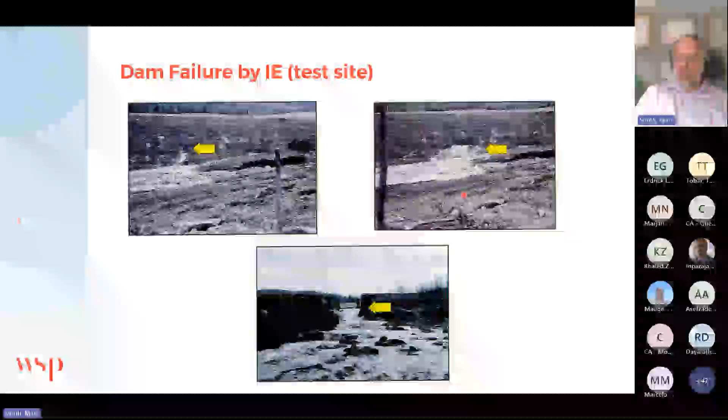So basically, internal erosion is, in fact, erosion of the soil internally due to seepage forces. And as we can see in the photos, this is a process. So it's not an instantaneous occurrence. Internal erosion is one of the main, in fact, the main geotechnical cause of dam failures in the world, as we can see here. So there's another example of internal erosion going on. So we see the reservoir and we see lots of seepage coming out of the dam, as well as the dam being eroded.

Another, let's say, prevalent cause of dam failures is what we call external erosion. The reservoir overtops the dam, as we can see here. But the primary causes of this are more related to hydraulics and hydrology. So basically, in geotechnical engineering, internal erosion is the main issue in terms of dam design, construction, and operation.

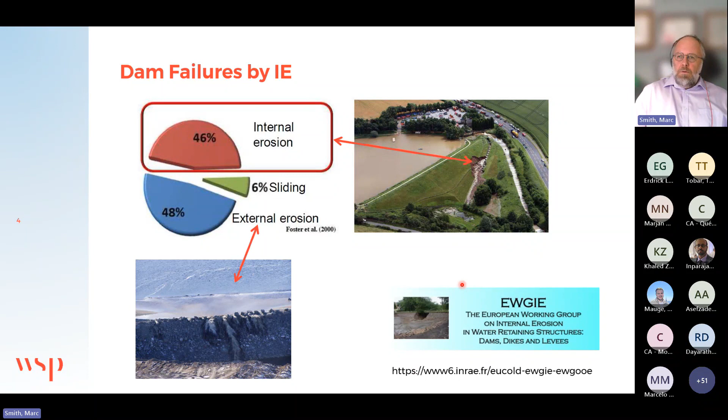As I said, there is lots of research going on in this field, including this group here, which is still quite active in bringing together practitioners and academics to increase the knowledge about internal erosion. For more info, the website is here. Also, academic research and practitioners are very interested in this subject. For example, there is one bulletin here that was published by the International Committee on Large Dams. In fact, it's a two-volume bulletin, volume 1 and volume 2, in which all the concepts behind internal erosion are explained, and volume 2 is mostly examples of internal erosion. So my presentation is basically based on the concepts presented here.

And also just to mention to everyone that these bulletins are available almost free of charge. One way to do so is to become a member of the Canadian Dam Association. You can be an individual member, or if the case applies, you can be a student member of the CDA and have access to this bulletin and all the other bulletins. Just to mention that the student membership is $5 a year.

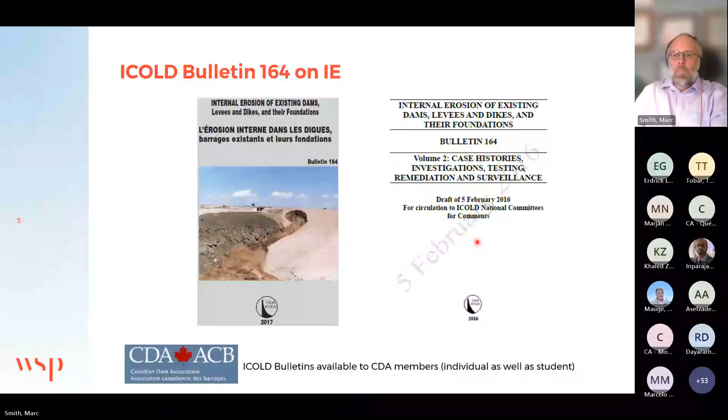So the initiating mechanisms involve soil particles under seepage with sufficient energy. So the particles are driven by this energy, which is the hydraulic load here. For internal erosion to occur, there must be seepage, obviously. Also, presence of erodible material along the flow path, and also a possibility for this eroded material to escape out of the dam. So these three conditions must be met if internal erosion is to occur.

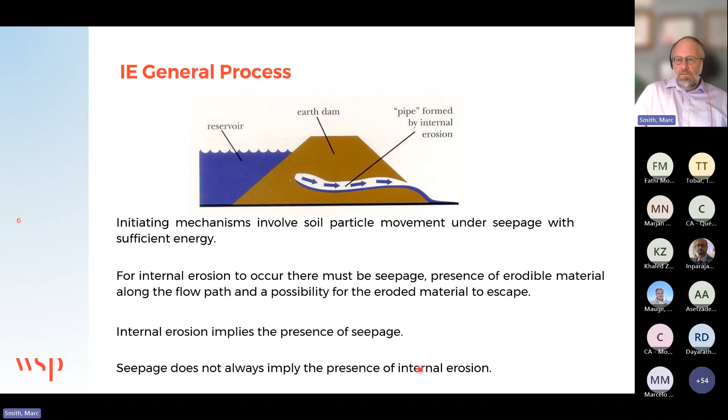So as a corollary, if these three conditions are not met, internal erosion should be prevented, and we should prevent it as dam designers. So we must prevent the presence of erodible material and also the possibility for it to escape. Internal erosion always implies the presence of seepage, but the reverse is not true. Seepage does not always imply the presence of internal erosion. So this is why it's so difficult to detect it in the field.

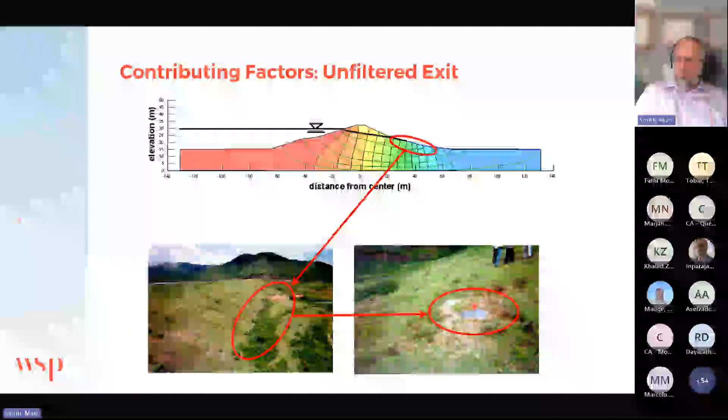So internal erosion is not completely a 0-1 event. It's not on or off. There are contributing factors that make the likelihood of internal erosion more or less likely. One of these contributing factors that increase the likelihood of internal erosion is unfiltered seepage exits. Here we see a flow net of a homogeneous dam on a homogeneous foundation without any filters, without anything. So we see the seepage exits here, which are not filtered. I'll talk a bit more later on filters. So the seepage can come out freely, as well as the particles that are eroded. Here we see that same dam with more vegetation where the seepage exits, and also here the particles that are eroded out of the seepage.

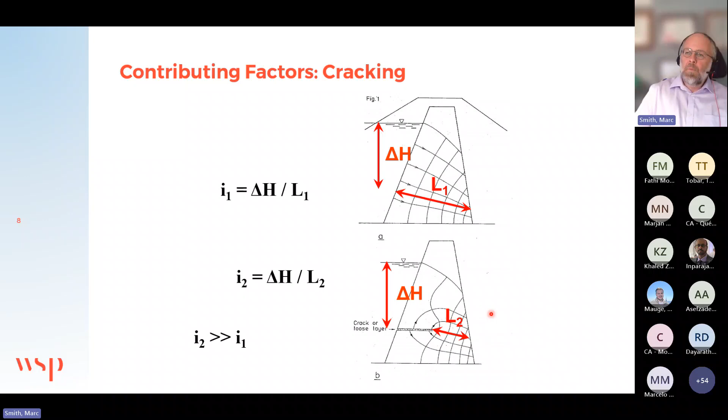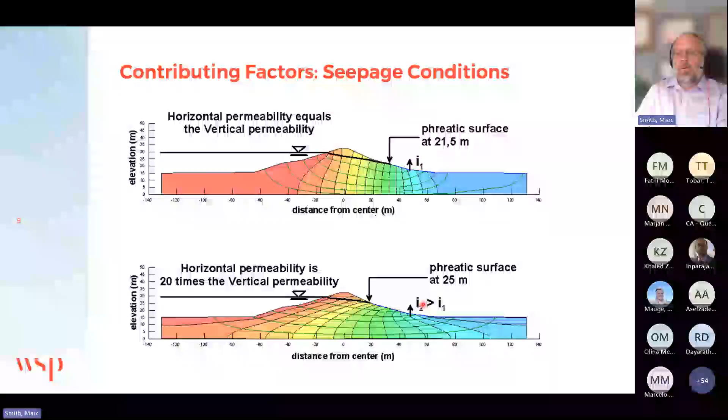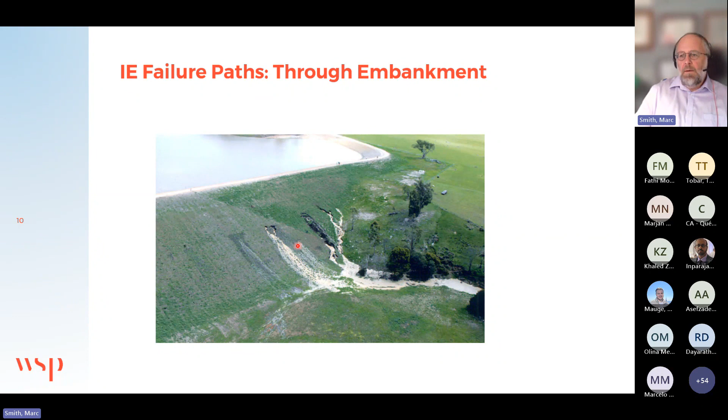And internal erosion can occur along many paths. So here it's the basic form of internal erosion through the embankment itself. Also, internal erosion is much more likely where embankment structures make contact, such as the contact between a rigid concrete spillway and a compressible embankment dam, such as this one. By settling, the dam can create gaps between the embankment and the spillway, and this flow path increases the likelihood of internal erosion.

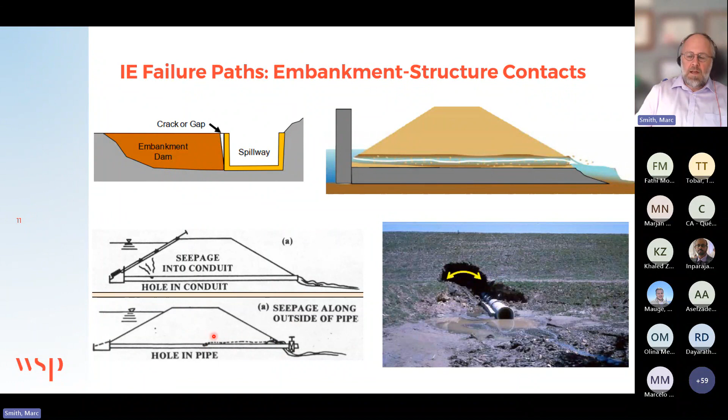Also, the presence of conduits in embankment dams can be a weak spot if not designed carefully. As we see here, erosion occurred outside of the concrete conduit. Here we see another figure showing the conduit and water coming out of it. If there's a hole in the conduit, then the seepage in the dam itself can go inside the conduit through this hole and erode particles with it. On the reverse, if there's a hole in the pipe and water flowing into it, then this water can come out of the pipe and erode the adjacent soil. This photo here is an example of this having occurred.

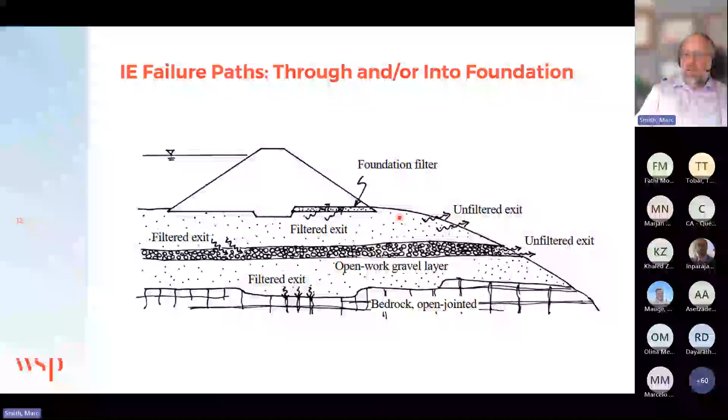Also, the internal erosion path can go into the foundation or through the dam and its foundation. Dam foundations can be quite heterogeneous, as we can see here. So the seepage can take any path it wants. And depending on the compatibility between the soil layers, we can consider that the seepage is filtered or not filtered. For example, here it's not filtered, so there is danger of internal erosion. It's not filtered here as well, so there's a danger here, etc. We'll see examples of this later.

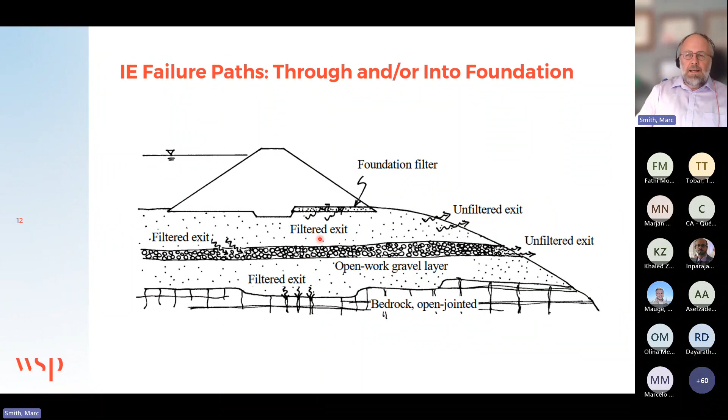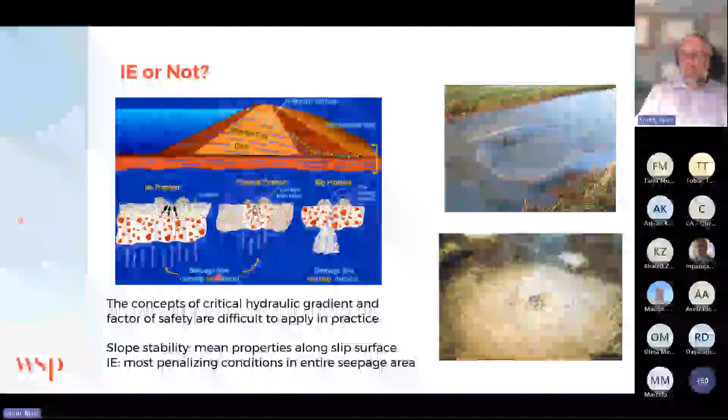In this case here, the water remains clear. It's only the same soil particles that are moving but staying in place, without new inflow of soil particles. So in this case, although it's quite spectacular, there is no internal erosion. This is what is shown on this figure. No problem, or possible problem: seepage flow carrying no material or no new material. And here there is a big problem, where new material accumulates at the seepage exit.

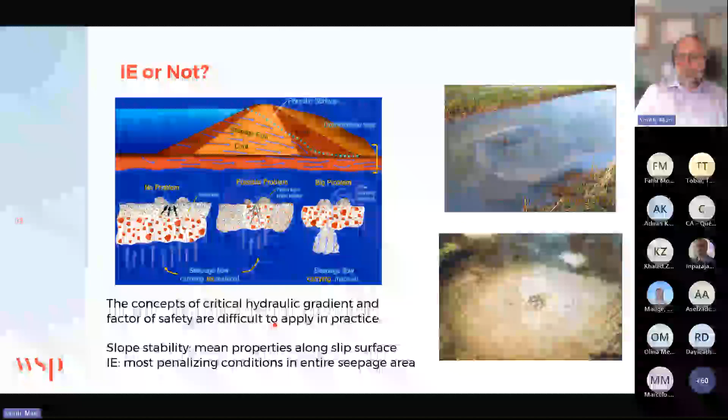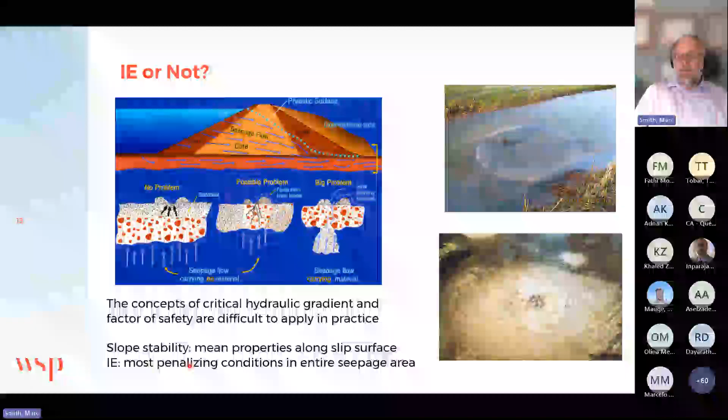What's also difficult with internal erosion is that there are no real factors of safety related to this phenomenon. We can see here and there critical hydraulic gradients, etc., but these concepts are more based on laboratory conditions and they are very difficult to apply in practice. So I wouldn't rely on any factor of safety estimation for an assessment of the likelihood of internal erosion. Also, internal erosion occurs exactly at the areas where the conditions are most penalizing. If we have a 1 kilometer long dam and there's one specific 10 centimeter wide area where the conditions for IE are met, then problems will occur there, regardless of the condition of the dam elsewhere. So it's really at the most penalizing area.

For slope stability, it's a bit different. The factor of safety for sliding basically depends on the mean properties of the soil along the slip surface.

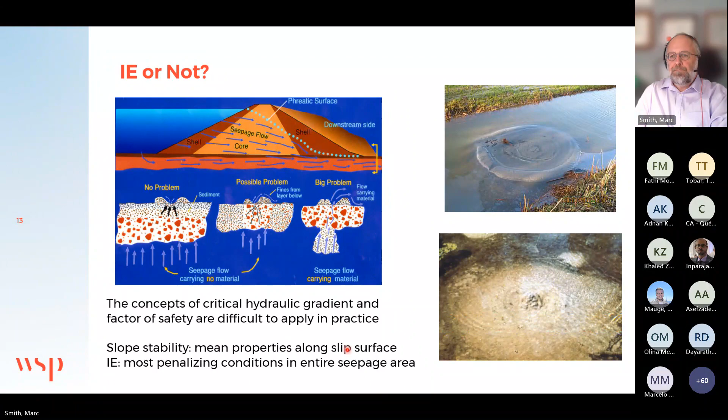IE occurs as a process, as shown. The first step is called initiation, where the soil grains begin to move. Continuation refers to the moving soil grains getting out of the dam system, so there is no filter. So initiation: particles begin to move. Continuation: the particles go out of the dam system. Progression means that there is nothing to stop the process. To stop the process, we can lower the reservoir, or the dam can collapse in itself.

There could be self-healing, etc. So there could be phenomena occurring during continuation that stop the progression. And if nothing stops the progression, then the breach will occur. So there are 4 basic steps in the IE process.

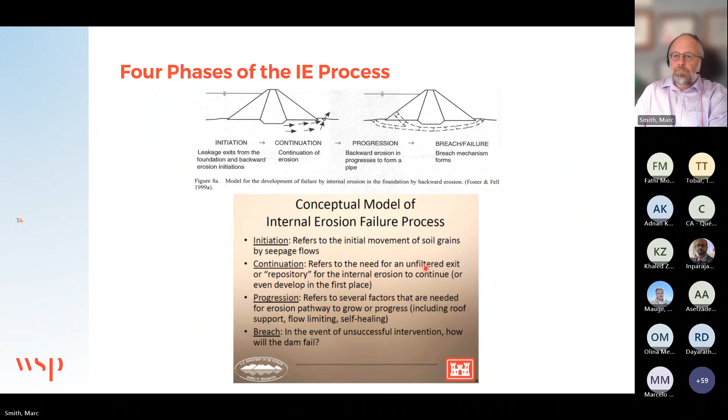Hello, Marc. I think we lost you. Yes, I'm still here. Now it's working fine. Yeah, we lost you before. It's okay? Yeah, now it's working fine. Yes, I saw that.

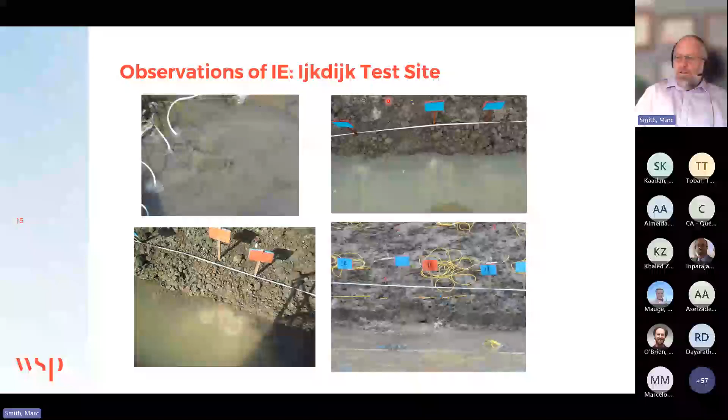Perfect. So I was in the process of initiating internal erosion at that Ijkdijk test site. The water is cloudy here, so the first particles were starting to move. After a while, we could see some specific seepage areas where the particle content became a bit higher. Then the specific area began carrying out a larger amount of particles. After that, a hole could be seen, and a delta made from these eroded particles as well. Then the delta became larger and larger, and the hole wider. All of this led to the rapid formation of a breach.

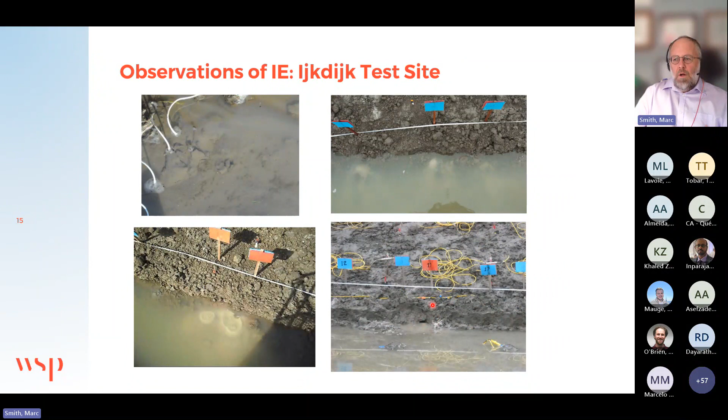So it's really a process that starts slow, but when it evolves to a certain point, there's pretty much nothing we can do to stop it.

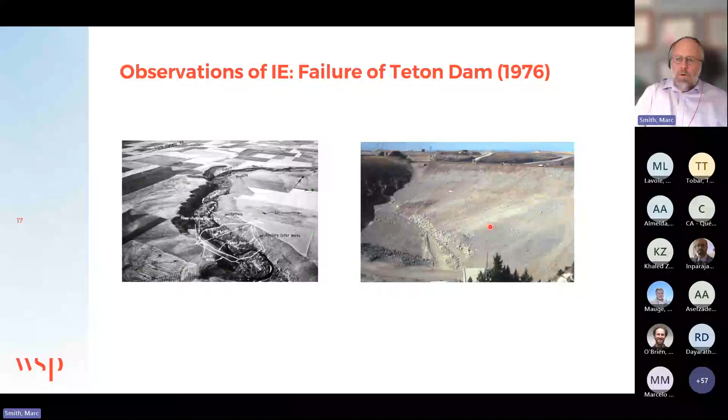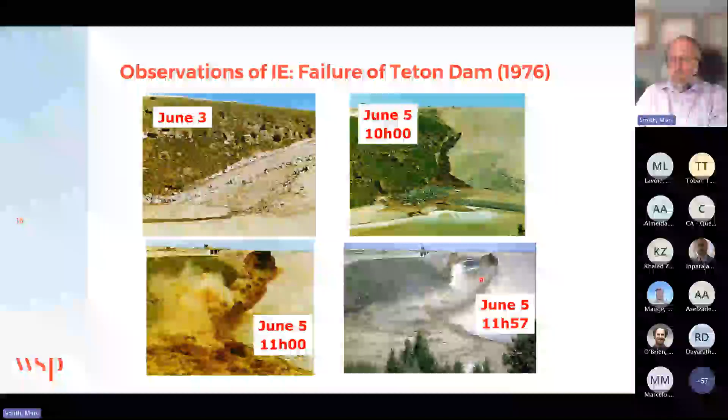An example of internal erosion is the Teton Dam in Idaho that failed in 1976. Here we see the area before dam construction, and after construction. On June 3rd, there was some seepage here. A few days after, the seepage was a cascade of eroded soil, which led to erosion shortly after. This was filmed by a video camera at the time.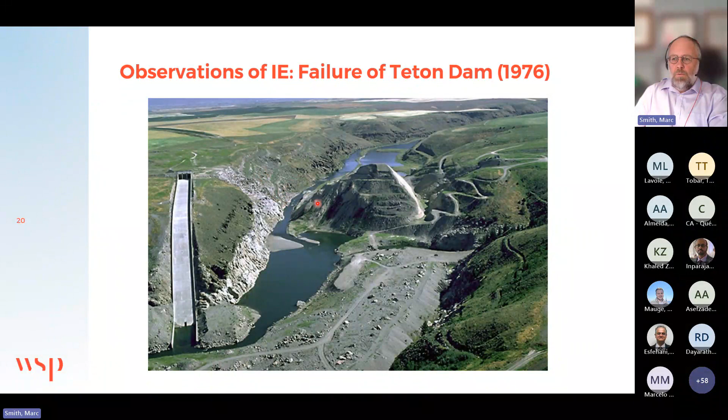Marc, we lost you again. Can you hear us? Yes, okay, I'm back again. Yeah, you're back again.

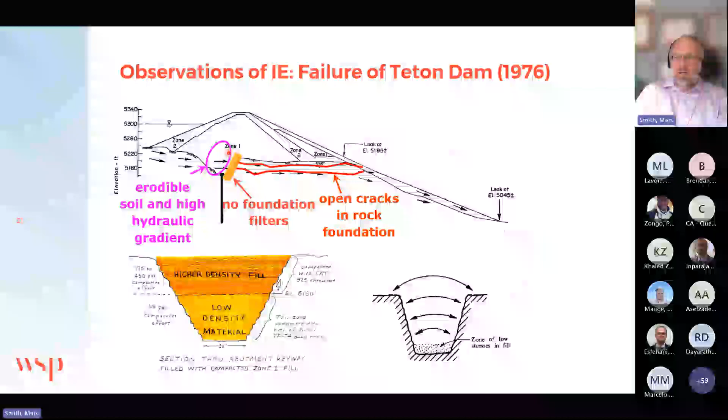Also, there were no foundation filters between the key and the rock, the bedrock. So there were no filters. The shape of the key trench, the compaction of the key trench, all of this contributed to material and hydraulic conditions prone to internal erosion.

So basically, this shows that all the latent conditions that we see here were in effect all at once. It's like the Swiss cheese comparison. If all the holes are aligned, then there is a likelihood of having a problem. This is what occurred at Teton Dam.

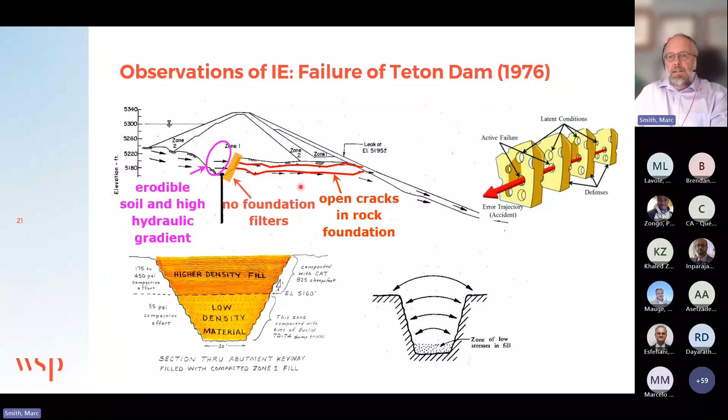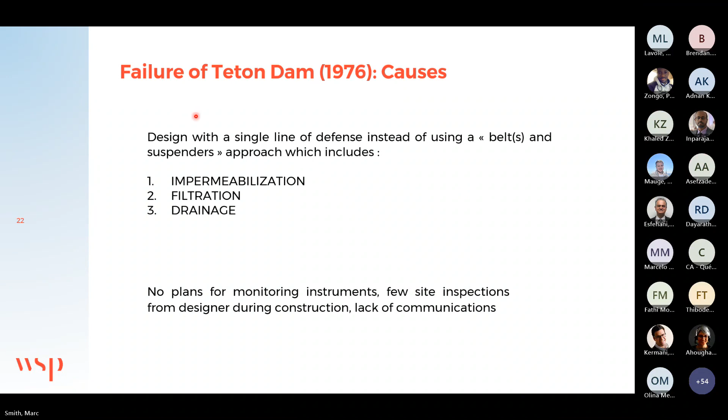The problem with the Teton Dam is that there was a single line of defense instead of using belts and suspenders, which include impermeabilization, filtration, and drainage. So clearly filtration here was an issue.

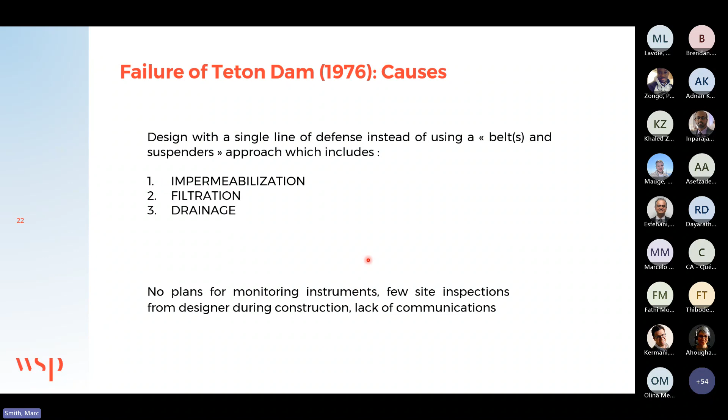Also, there were human factors in this case study. The people there knew how to build an adequate dam. It was not ignorance on their part. It was not absence of technology, because this type of dam was already built before. It was mostly for political and administrative reasons. They preferred to reject some of the geotechnical concepts that could have helped in preventing the internal erosion failure.

This is not my judgment. It's described in this publication here, which is very interesting. I suggest you go and read it. Mr. Sowers analyzed about 500 civil engineering failures and came up with the conclusion that rejection of technology was the most prevalent cause of failure, such as Teton Dam.

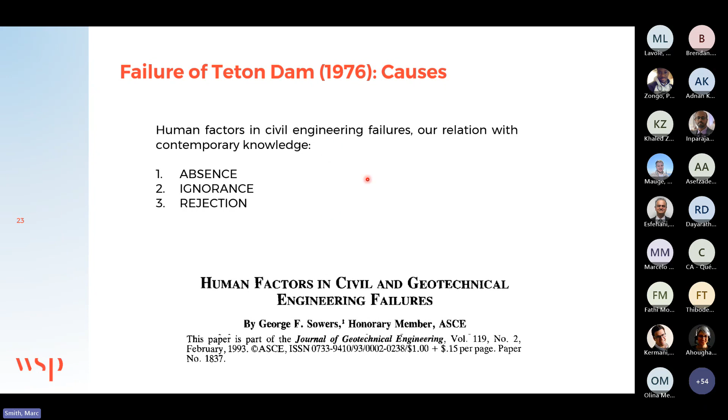Back to the initiation phase, the first phase, it can occur by 4 different mechanisms. The first one is suffusion.

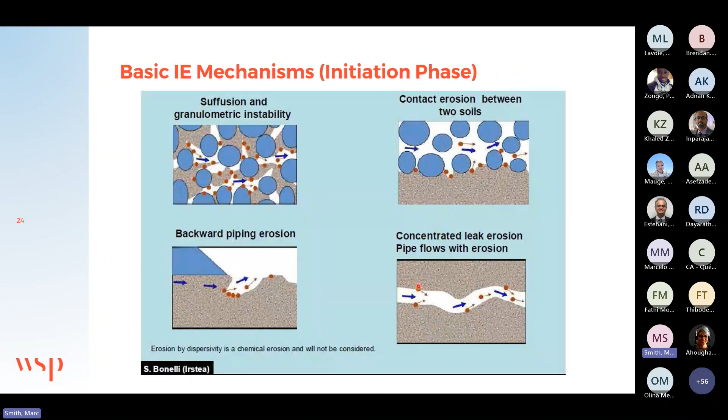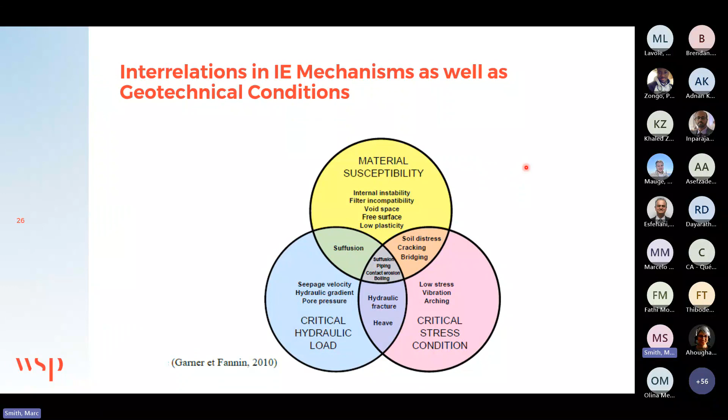Also, when we assess the risks of internal erosion, we must assess at the same time the material susceptibility to IE, the hydraulic loads in our system, and also the stress conditions in our system. So it's not always an easy task. We have many things to consider at once to have a complete picture of the internal erosion risks.

Now, the second phase of the process is the continuation phase. The most efficient way to stop this phase is to have well-designed filters. I was talking earlier a lot about filters. So here we see a filter. On top, we have the material that needs to be filtered, where the seepage is occurring, basically the impervious core of a dam. Here we see a crack, for example, in which concentrated leak erosion is occurring.

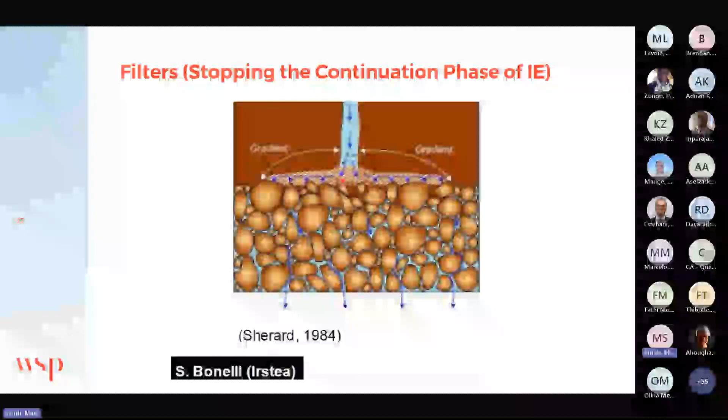And down here, in the lower half of this figure, we see a filter. So there is fine material that needs to be filtered, and coarser material that constitutes the filter. The two basic properties of a filter are, first, to retain the eroded finer particles, such as seen here. And the second role of the filter is to drain, to let the water out. So the filter needs to be coarse enough to let the water out, but fine enough to keep the eroded fine particles in. So coarse enough, but not too much.

Again, we see another representation of a filter, with a base that needs to be filtered. Seepage is occurring. Some finer particles were eroded, but they were trapped in the filter and water could easily go out.

Here we see a typical cross-section of an embankment dam. Zone 1 material, in this case, is impervious, semi-impervious fill, and this orange material here is a filter. It's filter material. So basically this area is to filter seepage that comes out of the central portion of the dam. This area here filters the seepage coming out of the core that could go into the foundation. That was missing for Teton Dam. And here we see other filter layers that could filter seepage from the foundation.

Here we see a photo of a filter being built. This is typically sand here. And on the other side, we see a dam core being built. In this case, it's silty sand.

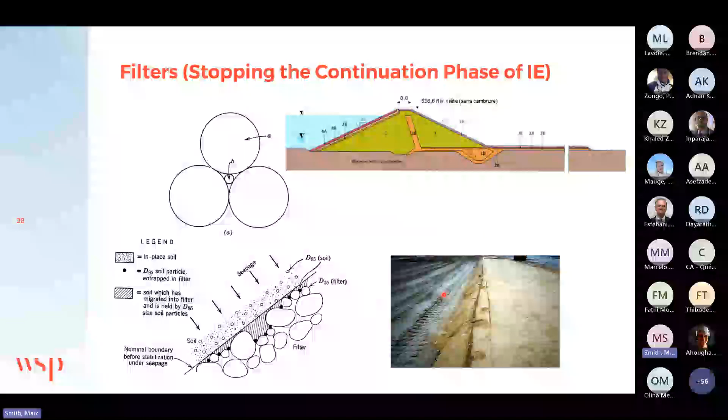There are criteria to design filters. This one is well known. It's the Terzaghi criteria, named after Terzaghi, in which we have the grain size distribution of the base and the grain size distribution of the filter. The retention criteria, to retain the small particles, is shown here in blue. The permeability criteria, where we want water to come out of the system, is shown here in pink. So this is the basic criteria.

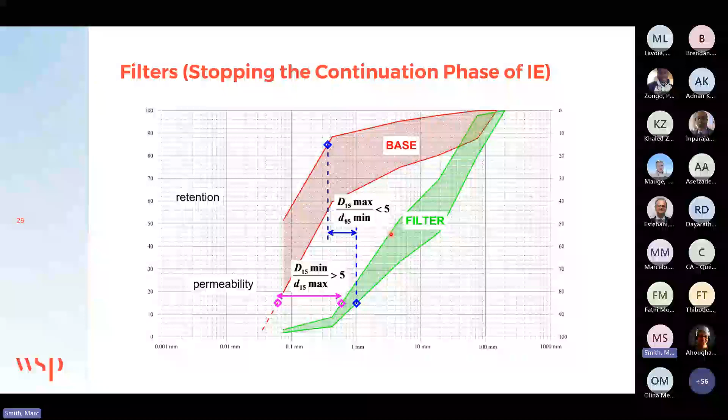So Teton Dam failure, in hindsight, what could have been done? Basically, to have a wider excavation in the bedrock, to have a filter zone at the contact of the core and the bedrock, and also to better compact the soil of the dam core and increase its plasticity. These are all options that could have been put in place and that could have reduced dramatically the likelihood of internal erosion. It could have filled a few of these holes here and made internal erosion much less likely.

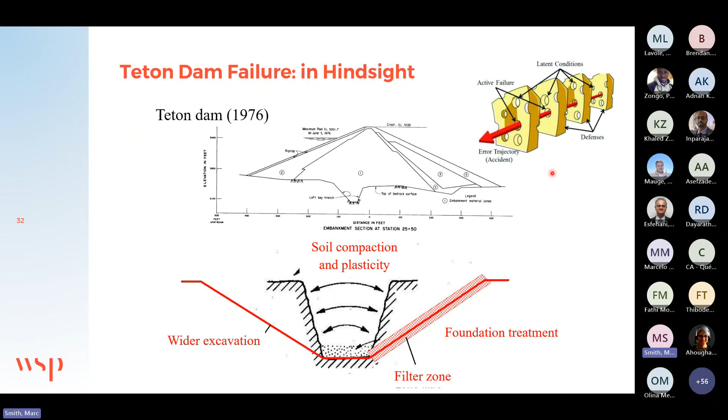So now, the other part of the presentation, seepage detection. Basically, we want to detect seepage because we have some kind of fear of internal erosion going on. Seepage detection and internal erosion are linked this way. There's an internal erosion risk, which is controlled by the presence or not of filters and hydraulic gradients, and this is controlled by the presence of seepage, and seepage detection is to detect seepage. Again, internal erosion is always in presence of seepage, but seepage is not always a sign of internal erosion. So why detect it? It's one component of assessing IE risks, to better understand what's going on and also to optimize possible rehabilitations.

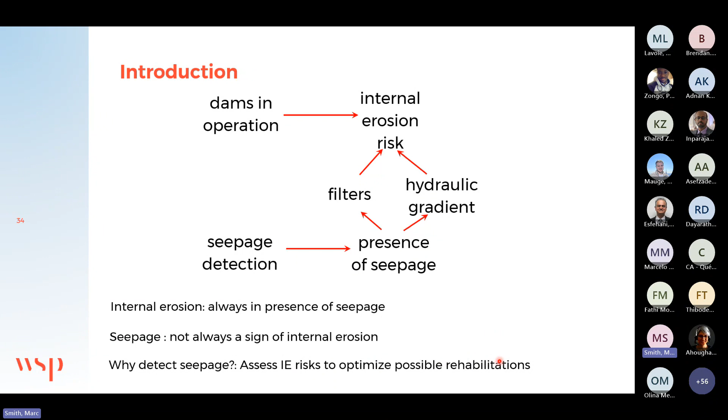Before trying to detect seepage with sophisticated techniques, visual inspection is always the preferred means for seepage detection. Visual inspections can readily be done when the area to be inspected is cleared of vegetation and is readily accessible. We can see seepage clearly, as shown here. We can monitor it, etc. So these are ideal conditions.

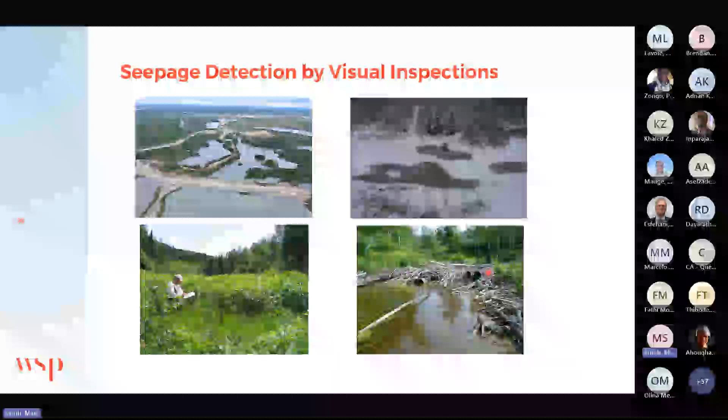Less than ideal conditions are shown here, where the downstream portion of the dam is covered by water. Also here, this water can freeze, so it's almost impossible during winter to monitor seepage, in this case beneath the lake that was there. We can see some warmer spots here that melt the ice, so we can assume that there is seepage going on, but it's difficult to monitor. Another typical difficult situation for visual inspections is when the area to be inspected is heavily vegetated, so it's difficult to see seepage. Another one, here in the province of Quebec, we have lots of beaver dams, so these can affect our capacity to detect seepage visually.

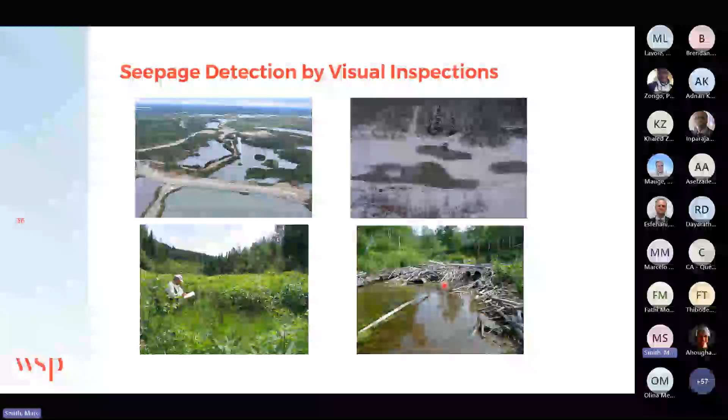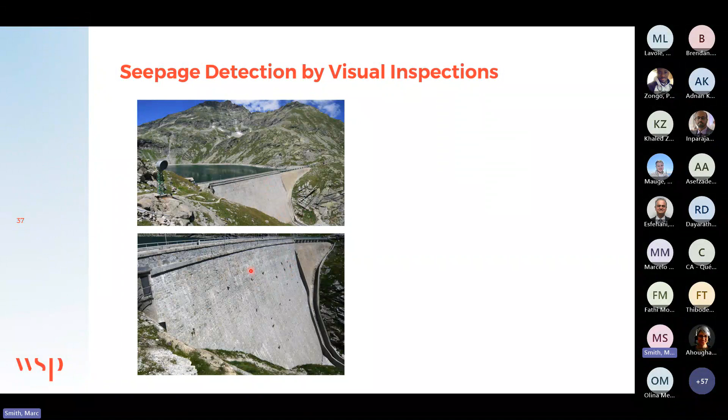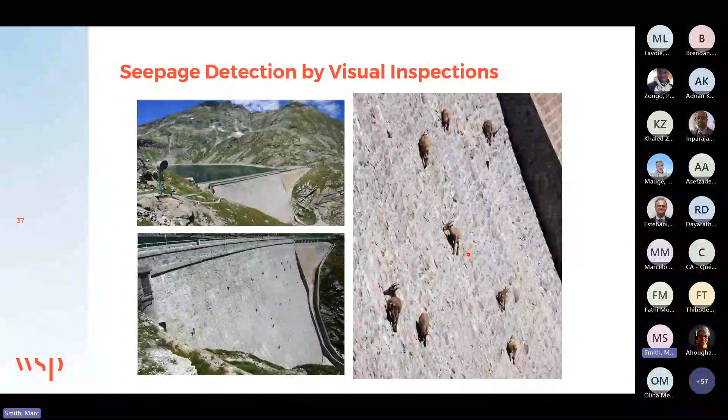Seepage detection also occurs for concrete dams. In fact, this is a masonry dam shown here. It's difficult to access the downstream face of that dam because it's so high and so steep, but still these little guys here can access it. These mountain goats are basically trying to detect seepage through the mortar of the masonry. So they can do it, but obviously we cannot, not as easily as they do. So another way to detect seepage in these situations is to use specific seepage detection methods.

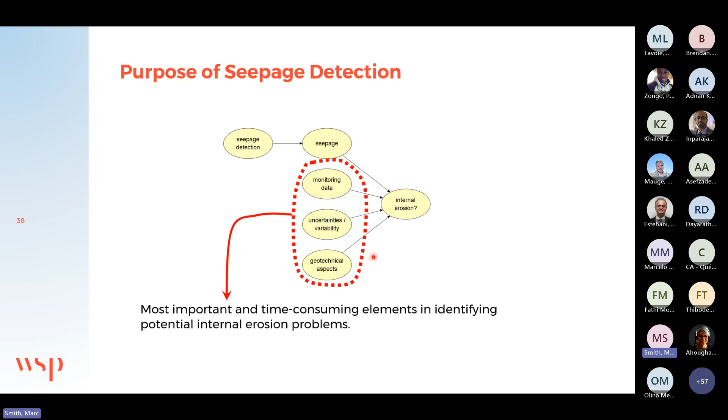We want to detect seepage and finally assess the risk of IE. But what is shown here is that seepage detection is not an end in itself. We also need to consider the monitoring data, the variability, uncertainties, and all the geotechnical aspects. These elements are typically the more important and also the more time-consuming in identifying potential internal erosion problems. So I'm talking about seepage detection, but bear in mind that the engineer has to do his homework before and after seepage detection.

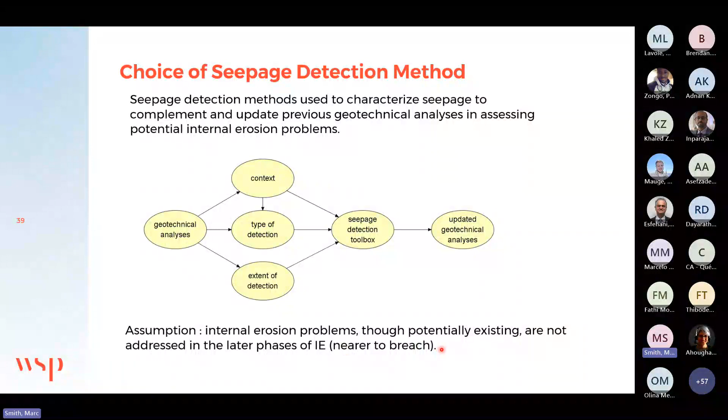There are many types of seepage detection methods, so we need to define this. What's the purpose of our seepage detection investigation program? To determine the type of detection, we need to define all these things, the geotechnical context, analysis, etc., and to choose in the seepage detection toolbox what we need to use. Also, the assumption appears obvious, but it's not always that obvious. Seepage detection is a good way to assess internal erosion risks, but you need to do it in the early phase of internal erosion, like initiation, for example. If the dam is near a breach, then it's pretty much useless.

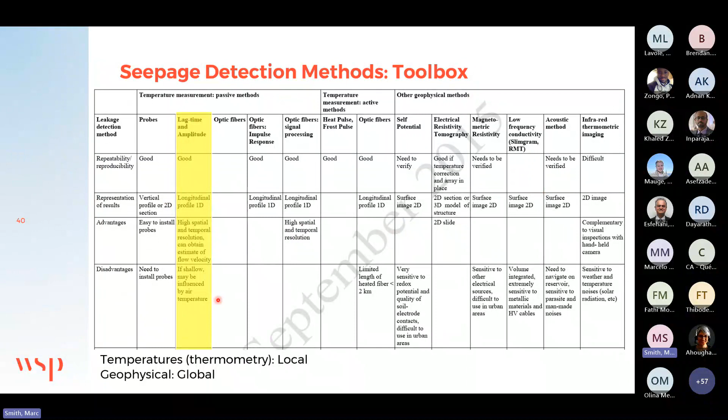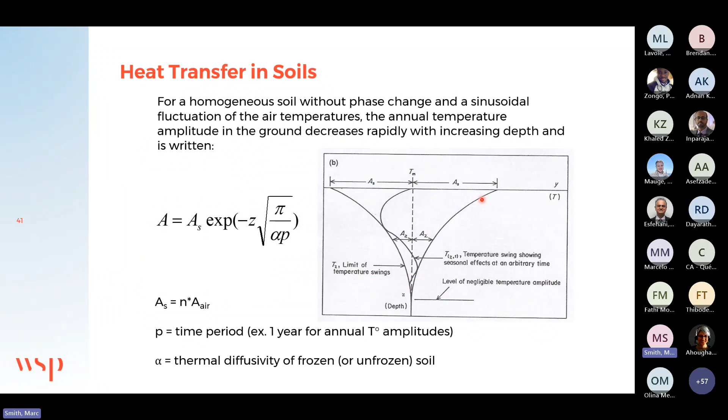Conduction also occurs in a dam, but also we have convection, so movement caused by differences in the air temperatures, and also advection, where the heat of the reservoir is transferred into the dam. So this is basically advection that we want to monitor to detect seepage. So in this method, we want to track the temperatures inside the dam and try to find areas where advection is occurring.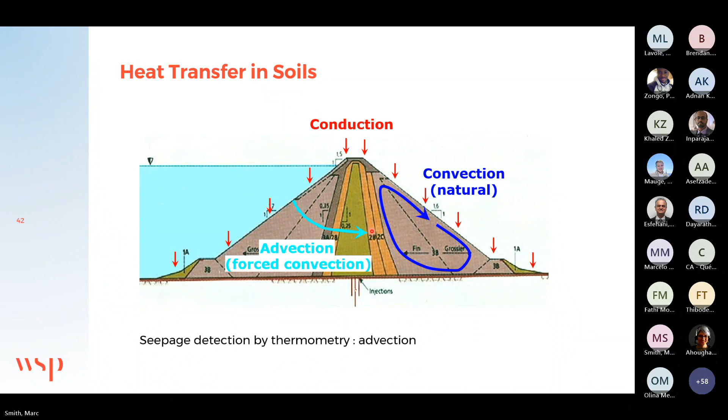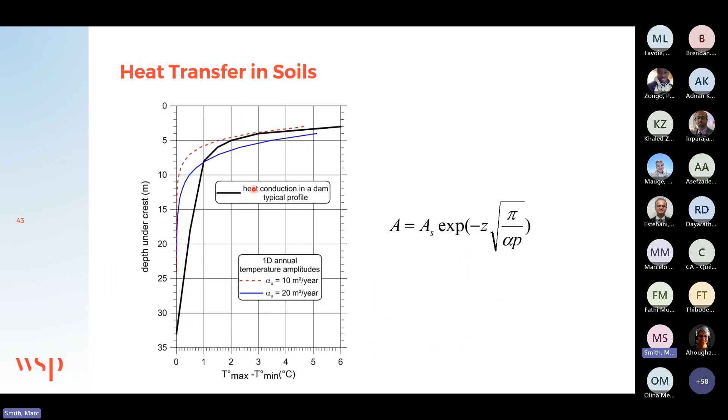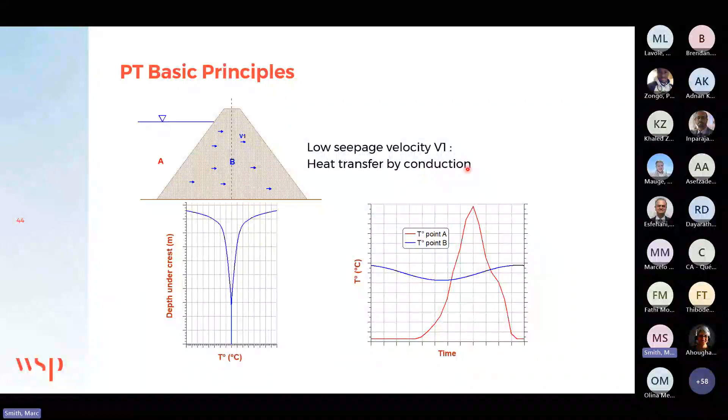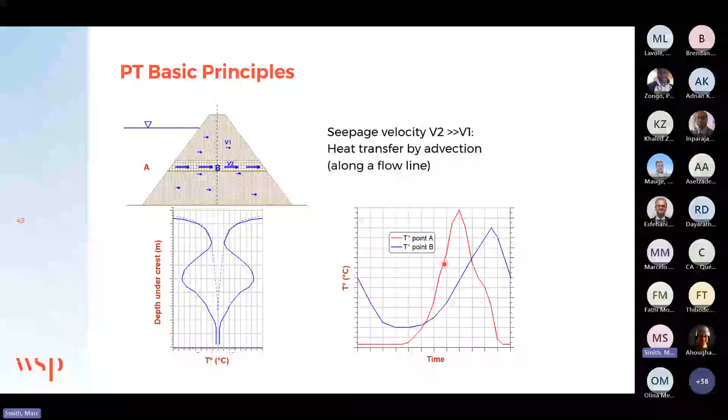When there's a pervious layer in the dam, then the temperature amplitude along this axis here is shown here. So the dotted lines are, as we have seen before, where seepage is not that high, but here we have a much different temperature amplitude profile. So there's clearly a big difference here between the measured amplitude in this case and the measured amplitudes where conduction dominates, where seepage is low. So if we look at that based on time, the temperatures at point A in the reservoir vary this way, but the temperatures in the dam itself at point B are much more similar to the variations in the reservoir. So that means that the heat in the reservoir is transferred in the dam. So we have detected seepage that way.

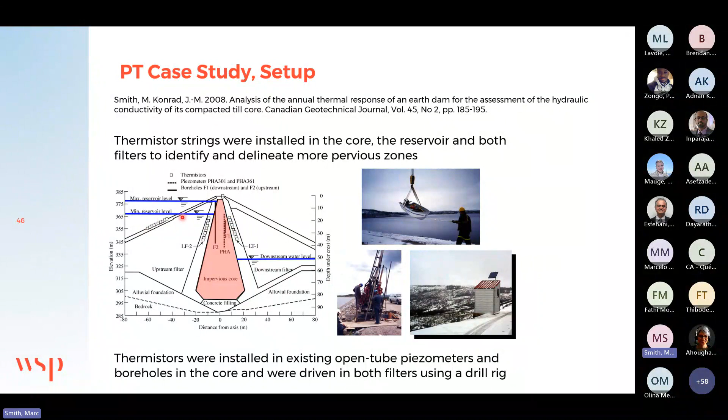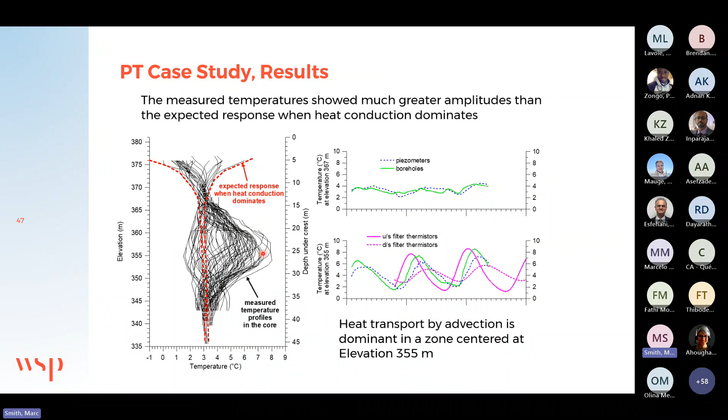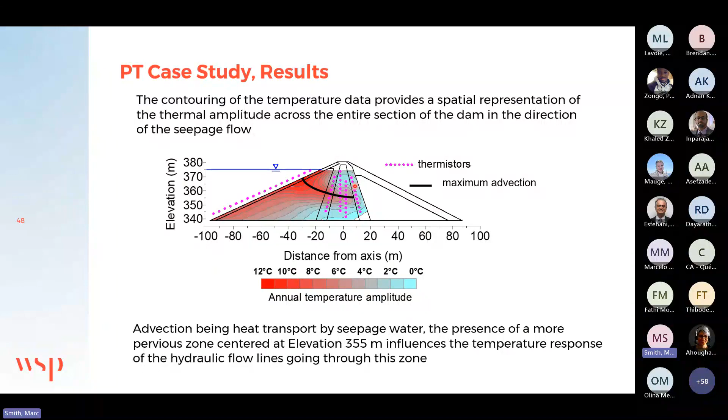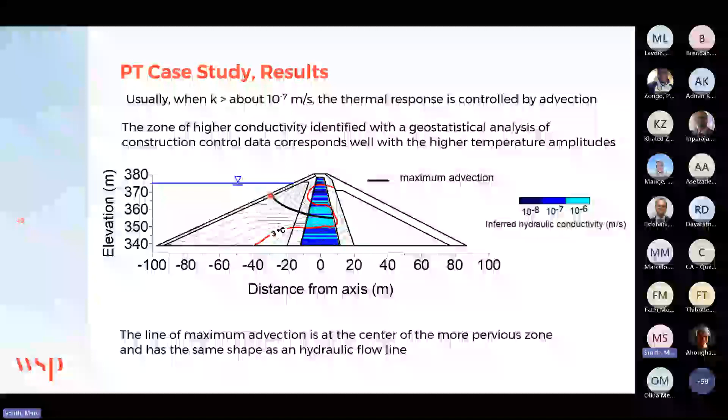So this is where all the geostatistical analysis and context come into place. So basically here, the permeability, the hydraulic conductivity of the in-place material was studied, was estimated. And if we overlap the hydraulic conductivity that was estimated with the temperature profiles, we can see that this maximum advection line was caused by the normal variations of permeability during the construction of this dam. So the variations were due to construction procedures. The behavior of the dam is okay, but still these variations can produce some preferential seepage path. So it was detected, and the presence of this zone is due to construction variations in material properties, normal ones during construction. So this is the $1 million question, why?

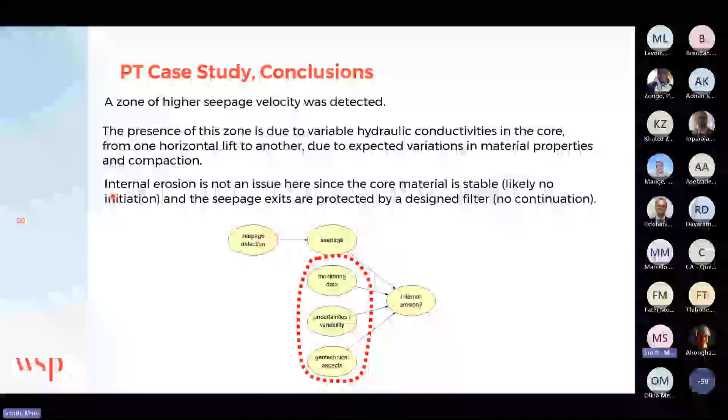And the $2 million question is, is it something to be afraid of? So here it is not, because the core material is stable, so very likely no initiation of IE. And also the seepage exits are protected by design filters, so there is no continuation. So all of this geotechnical work is basically related to this here. So again, it's the more time-consuming but important aspect of internal erosion assessment. So seepage detection, again, is just one component of the entire problem.